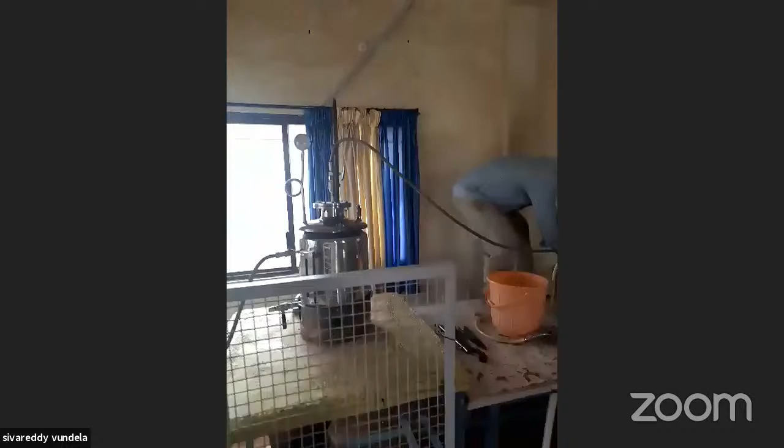Now I'm sharing the main components, then after I will explain individually. This is the small boiler. It can generate 4 liters of steam. Now you can see the pressure of the boiler also, 1.5 to 2 bar. Generally, 1.5 to 2 bar steam we send to the grinder and the cooker. This small boiler we connected, and this is the grinding and cooking unit.

Now we poured 2 kgs of soaked seed. I will show the soaked seed batch. This is the boiler. Grinding and cooking we are doing combined. And then we started the grinder.

In this model, the soaked soya seed, we are grinding. At the time of grinding itself, by steaming, we are doing cooking also. By this, we can extract more juice from the seed. That is the only motto of this combined grinding and cooking.

Some of the soya plants, what they are doing, first they are grinding and separating the milk. That milk again they are cooking. In this manner, the productivity of the milk is reducing. The energy required for the milk production may be decreasing, but the productivity of milk from the seed is reducing, and the protein levels of the milk are also reducing.

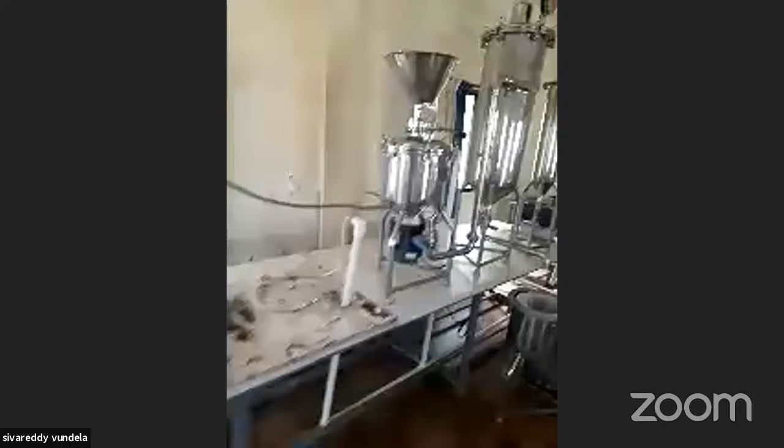Now this is the grinder cum cooker. See. Whatever steam we are producing, I think 1.5 to 2 bar pressure we are maintaining. In between that pressure, we are sending the steam. Our target here is at least it has to reach more than 1 bar pressure. More than 1 bar pressure means around 110 degrees temperature we are achieving. You can see the temperature of the grinder and juice.

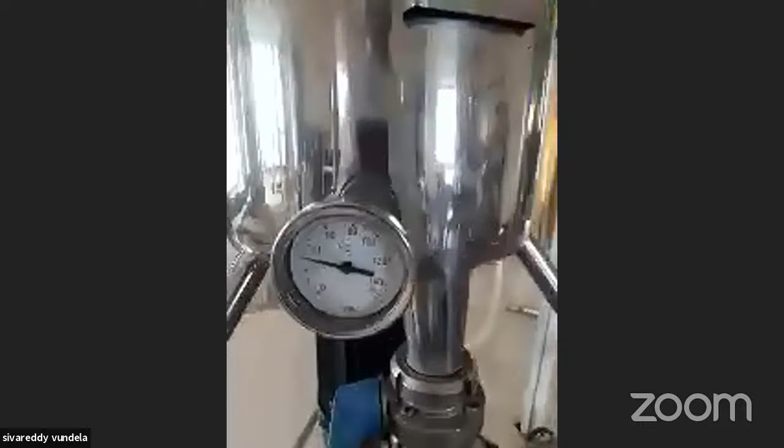For grinding and cooking it will take at least 15 to 20 minutes. Once it is crossing 100, near 100 to 110 degrees temperature, the pressure of the unit will also cross 1 to 1.5 bar. Then we will stop the steam supply to the grinder and cooker.

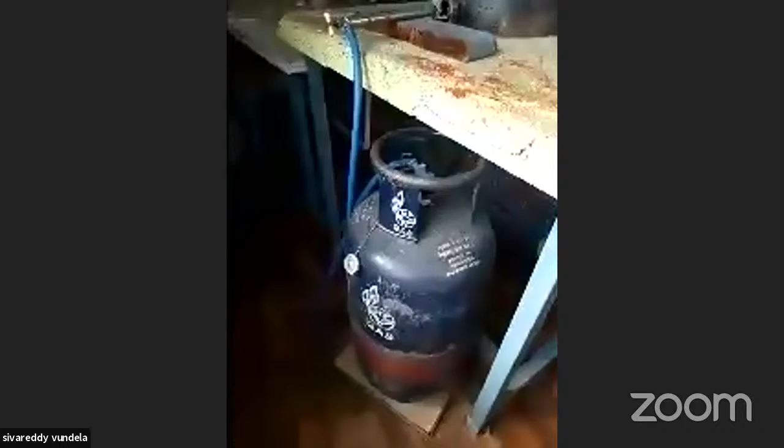For this boiler also, a general commercial LPG gas connection only we are using, because per day maximum we are running 3 to 4 shifts only. At least 4 batches per day we are doing. Per batch, by soaking 2 kgs of soya bean, we can produce 15 liters of soya milk. You can see.

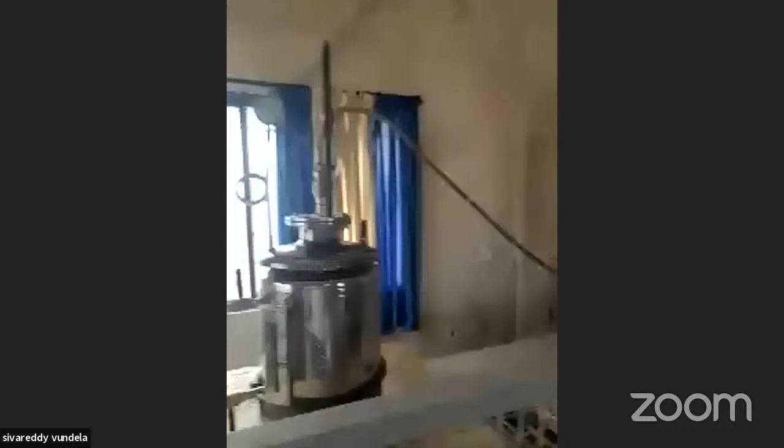Now we are mixing calcium lactate for making paneer. Once we get the milk, then we will make paneer. For curdling the milk, generally in households we use citric acid. But the main drawback of citric acid is an odor. For removal of the odor, at least 4 to 5 batches of cold water are required.

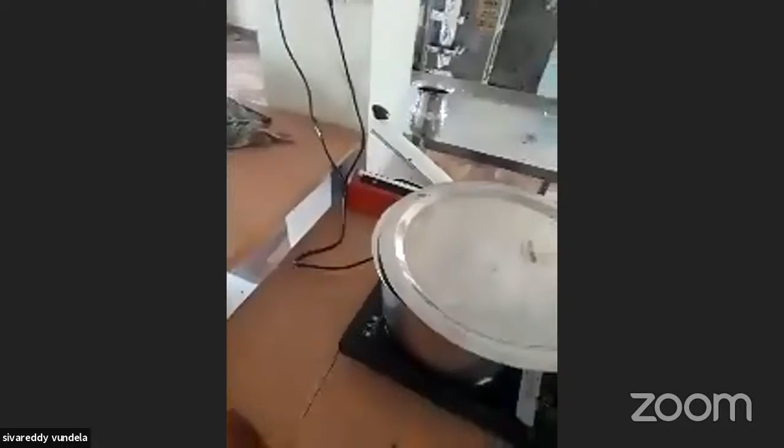See, this water we are steaming, in between 90 to 100 degrees. We are heating the water. In that hot water, we added calcium lactate.

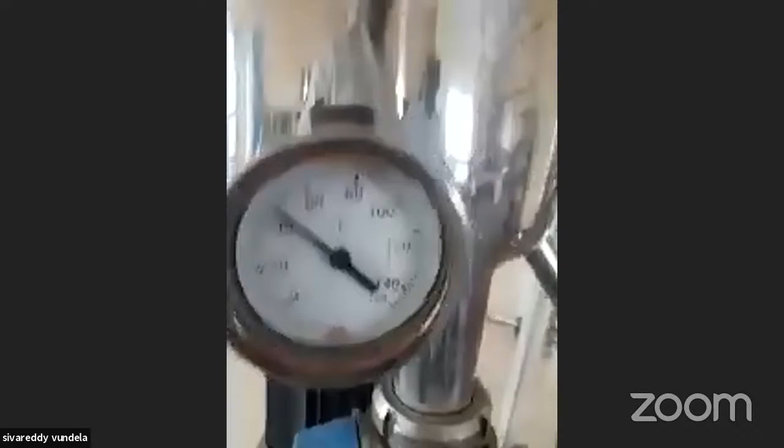Now we stopped the grinding operation. Now the roaring sound is stopped. Now only cooking we are doing. You see the temperature now. Before starting we saw 20 degrees, now it has moved to 40 degrees. Now only steaming we are doing. By steaming we are doing the cooking.

Cooking has 2 methods. If we cook by flame, the odor will increase. If we cook by steaming, proper cooking of the entire product will take place. Effective mixing, effective homogenization of the soya paste will be created. I think it will take 10 to 15 minutes. Already 10 minutes completed.

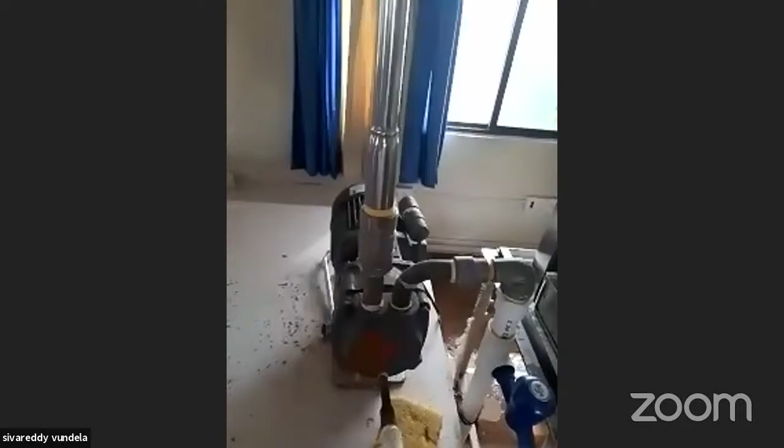Next, after this, we will do vacuum suction. We are creating vacuum by using this vacuum pump. See, by this vacuum pump, we are creating the vacuum suction, because we want to transfer this juice, the grinded and steamed soya juice, to the second tank. Directly, it will not come. Only by creating the vacuum suction will it come.

For vacuum suction, two advantages. We are removing the odor also. Material is coming forcefully into the second tank, and water is going through the pump. Water is exhausted. So some of the water we are removing by vacuum suction only.

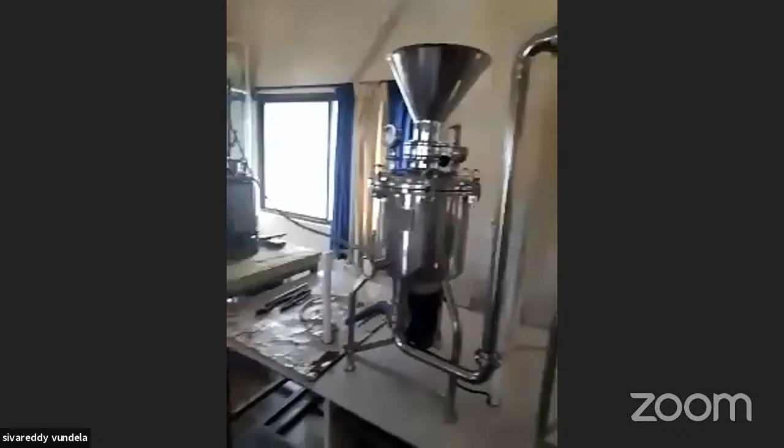If we are not using this method, the earlier method I mentioned, we soak the seed. After grinding, we separate the okara and milk. At that time, for water removal, they are not doing anything. They are adding the flavors. Once the temperature is increased, the flavor will evaporate. Again, the odor will come into the picture. We can't drink the milk. If we use this method, majority of the water we can remove at the time of vacuum suction itself.

You see the seed skin, you remove the seed skin after soaking. For 2 kgs of seed, this much of skin we remove. This skin we are directly feeding to the buffaloes or cows. The cows who are eating this high protein skin, their milk productivity is increasing. Same milk we can drink. So there is no wastage in the soya milk plant.

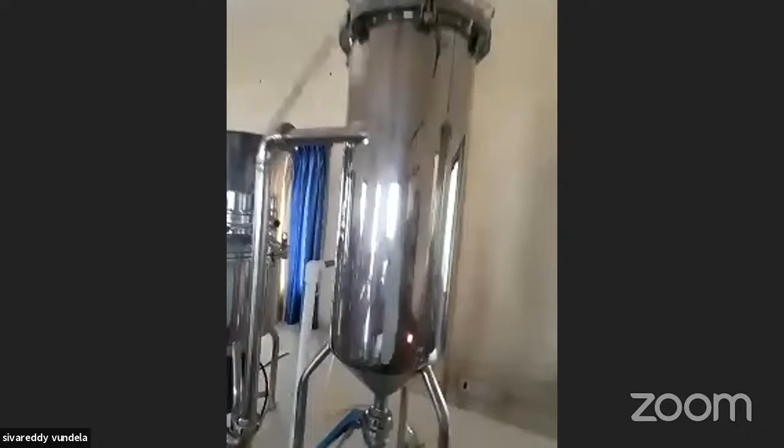Two vacuum suction tanks we connected because some of the liquid and solid will come into this place due to the vacuum capacity. If some of the liquid is coming, we don't want to waste that liquid. If we are not arranging a second tank, the liquid will directly go to the vacuum pump as wastage. So we connected the second tank, so that whatever vapors are coming due to more vacuum pressure will also condense, and we will collect milk from this second tank also. Our target is zero wastage. With zero wastage, we have to produce the milk.

Soya seed, after soaking, skin we are removing. That skin we are using for feeding the cows or buffaloes, whatever animals. Humans can eat it, but at present we are not doing any trials on human beings. We are giving it free of cost to the farmers. A small amount only, not more than 1 kg. Next.

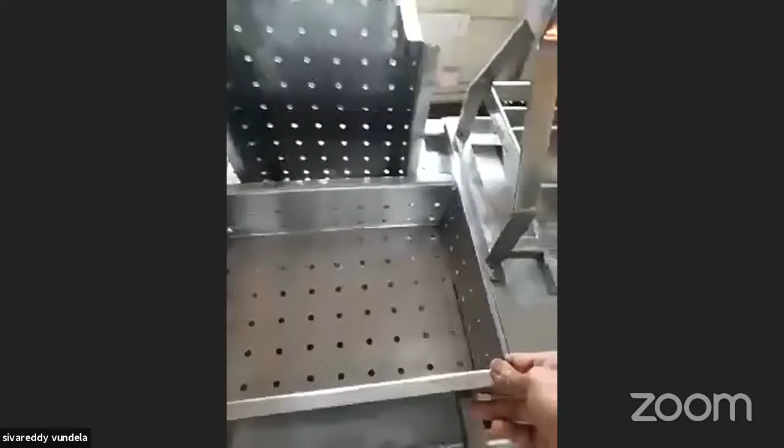After this, the calcium lactate I mentioned, see, we kept mixing. Mixes. After coagulation, while we are packing the milk, this is the paneer stand. We'll pour the solid, and whatever soya whey is coming, at present we waste it, but soya whey has the highest protein. We have to work out on soya whey also. At present we are not using whey because with a small amount we can't work. So here we are pouring.

Then we will put it in the press unit. Continuous gradual weight application. The paneer cake will be prepared. This is after preparation of the paneer. This is a paneer cutting bed. Each piece contains 250 grams. Generally we are producing 3 kgs of paneer per batch. Batch means 2 kgs of soya seed we are soaking. We can produce 3 kgs of paneer.

You see? Some flavors we are adding. It's not required. If we want to compete with badam pal or any other cool drinks, we can add these flavors. Generally, at the time of starting, we procured in 2000, I think. At present, flavor-free soya milk and soya paneer only we are producing. And in 2018, I think, we bought samples only.

The flavor companies are available in Delhi and Bangalore. They are providing all samples free of cost, 100 gram samples. You can see the samples. Which flavor is popular in our area? If we finalize it, they will send only that flavor in a 5 liter bag. Otherwise, all these flavors we get free of cost.

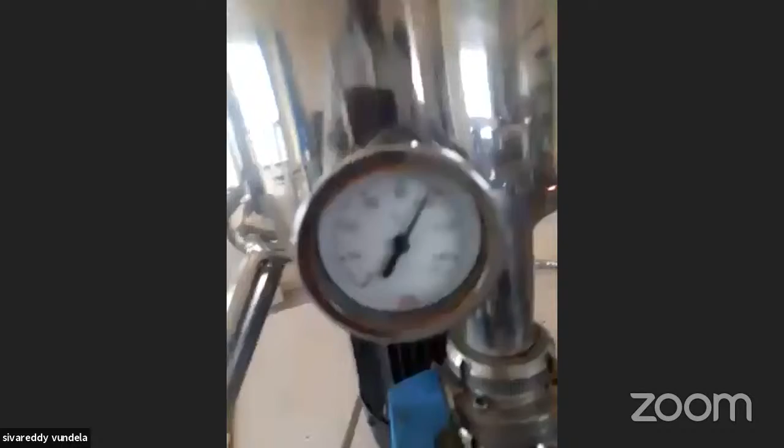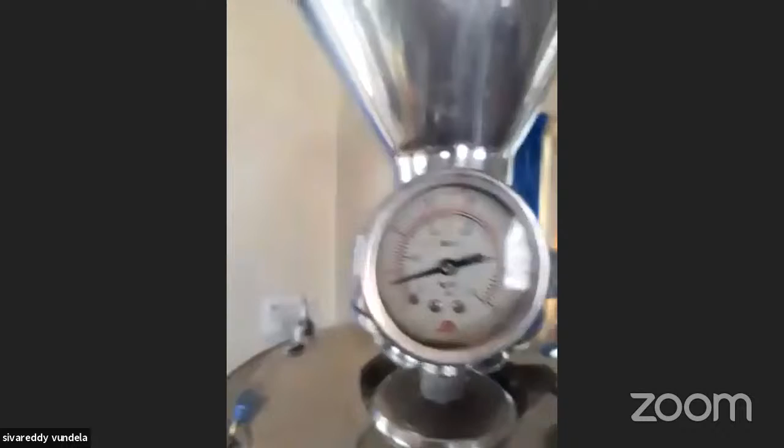Now we will go to the boiler section. What is the present condition of the boiler? Yes, now we are reaching around 100 degrees. You see, now pressure rise is also initiated. Earlier 0 pressure; this 0 means 1 atmosphere. Now it is rising. So our steaming continues. Our steam also we are maintaining

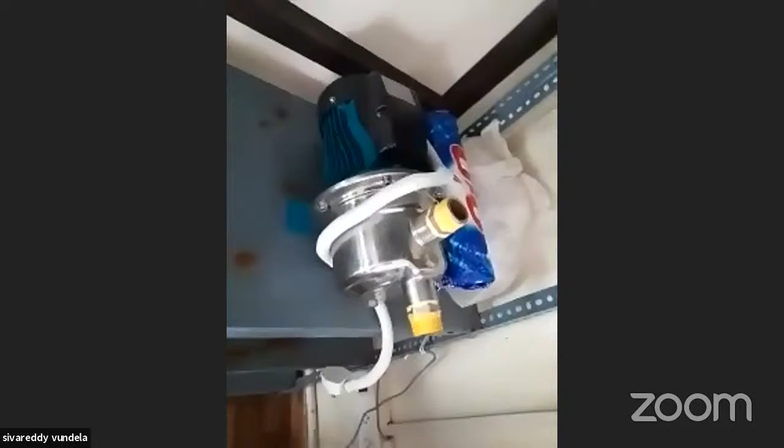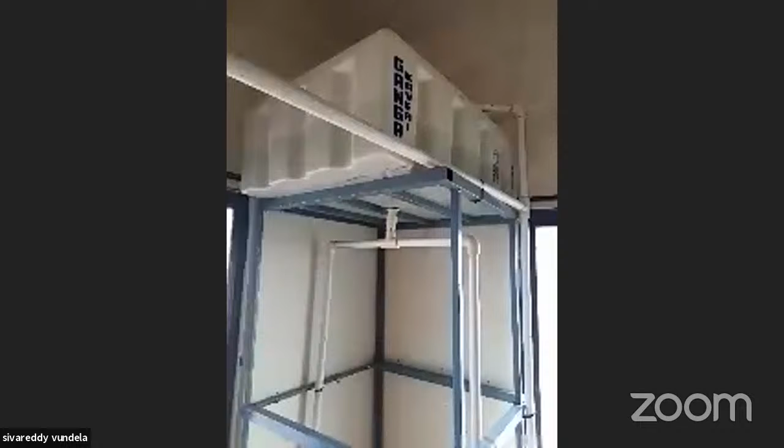And all this operates using our water plant, by pipeline connection. We are not maintaining a separate plant. The investment on RO is not a big thing. With 50,000 invested we will get the RO plant, but maintenance is required. For the entire college, one RO plant is there.

In the RO plant, we are maintaining an engineer. For the entire hostels also we have one more RO plant. From those RO plants only, by pipeline, we are getting RO water. The hardness of this water is 20 to 30 ppm. Generally, for long-term storage of soya milk, distilled water and chilled water, we can store

The rise is reaching around 1 kg. We stopped the heat supply to the boiler because we reached more than 1 bar pressure. We reached this by steaming, then we stopped the steam supply. Awesome.

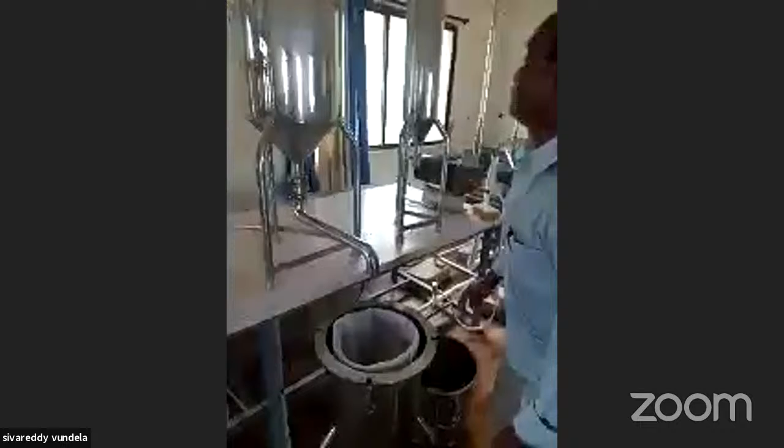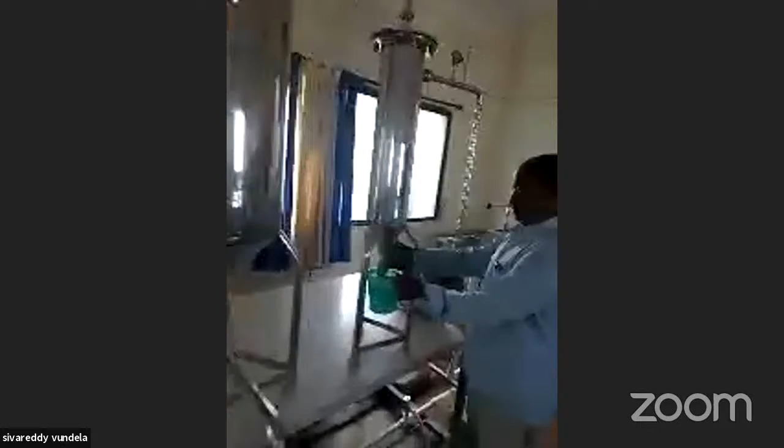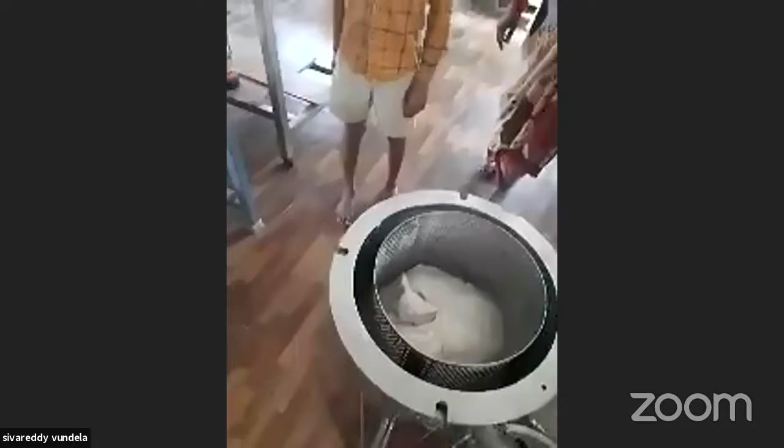You may also notice, with only one worker I am doing this entire thing. I am not using more labor for my operation. He is my assistant for solar projects and also soya milk. With one worker only I am managing this milk and paneer.

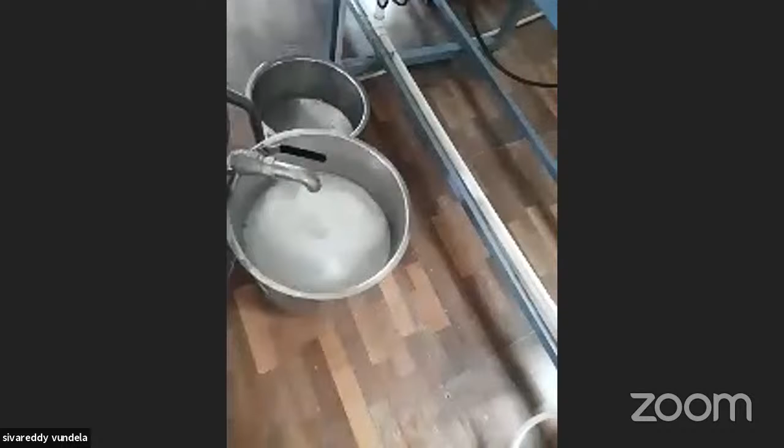In full-fledged commercial manner, like Sofit soya milk, if we want to produce 10,000 per day, full-fledged automation we can design - that expertise we have, there is no issue for that. But initially we are introducing to the public from a health-conscious point of view, not as a drinking milk.

Our batch plant capacity is 200 liters per day we can produce - this is our capacity. At present we are producing only 60 liters, so less than 50% capacity only we are running our plant.

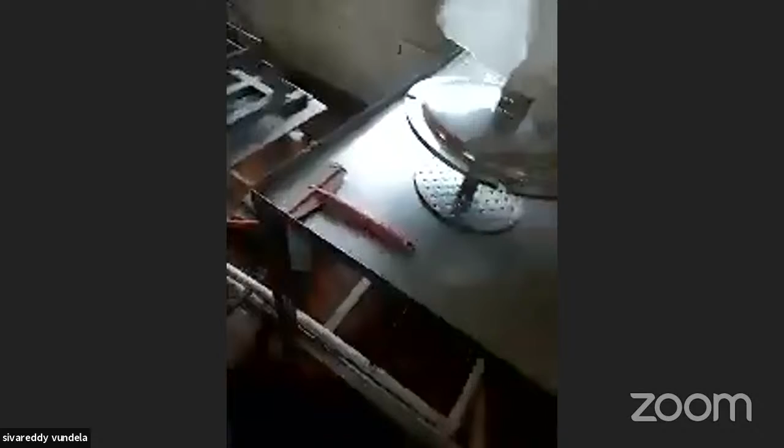We prepare a separate washroom also for cleaning of these things because we want to maintain separate washing and cleaning also. That's it.

Now you can see we are removing this cheese. This paneer whey contains more protein, but first we are adapting effective utilization of soya paneer and soya milk. Once they get very good awareness of the public in this region, Andhra Pradesh, then we will start working on this paneer whey also.

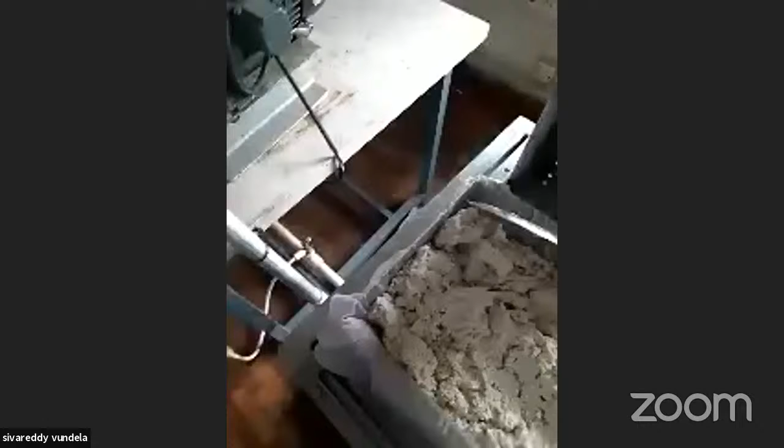Now this cake, see, by equally pouring. Because for all pieces, every piece has to maintain 250 grams, equal distribution of the mass is required. Equal distribution.

Now we are closing this one for mechanical pressing. For this also, if large capacity is needed, a pneumatic pressing unit can be purchased, but since it is a small unit, we are using a manual pressing unit only.

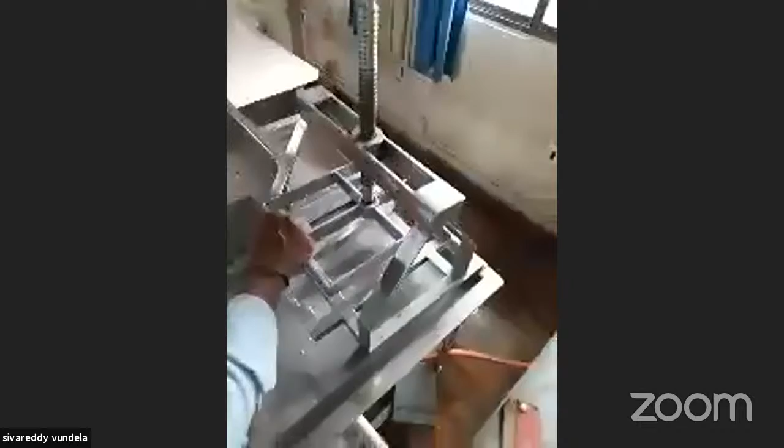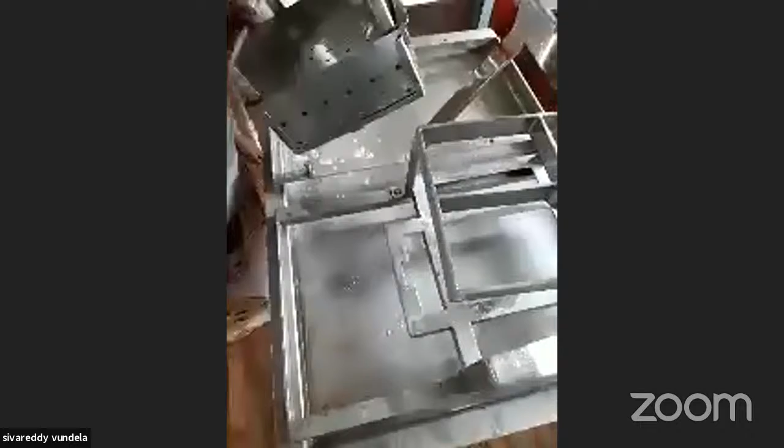Now we want to prepare effective bonding of all solid material.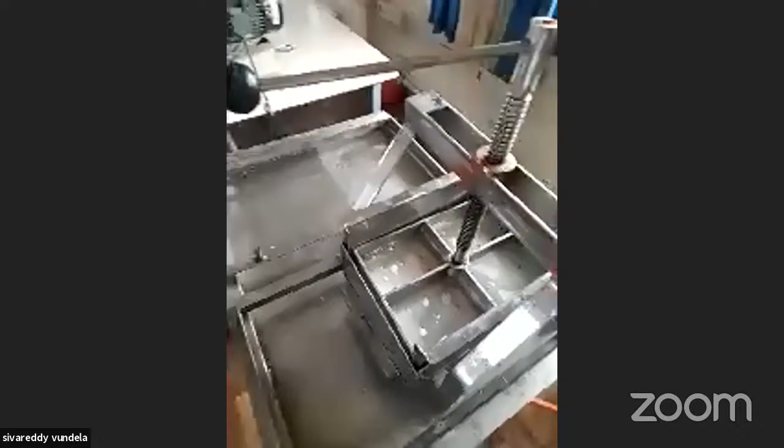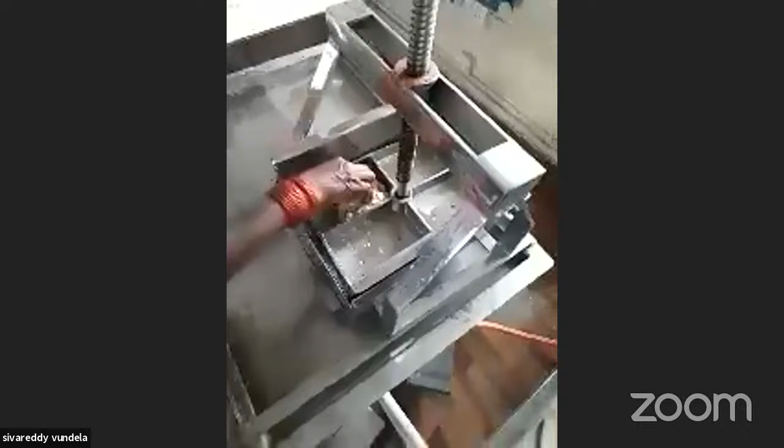At least it will take 10 to 15 minutes. Suddenly we can't apply entire pressure, so stage-wise pressure we are applying. After reaching steady state, again we are applying some more pressure for effective bonding.

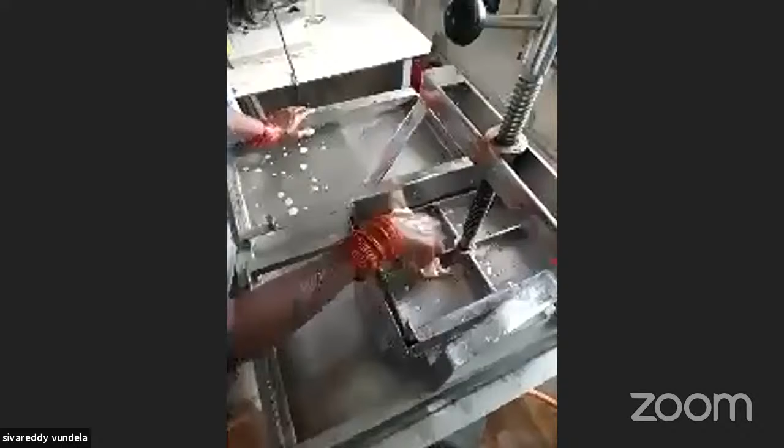You don't want to apply more pressure. By free hand, how much energy it is possible to apply, that's all. Wait some time, again bonding will take place, apply some more pressure. Like this, at least 10 minutes we are taking time. Now we started a second batch also. In the third, we are pouring the heat, liquid, and the boiler also. We started the boiler.

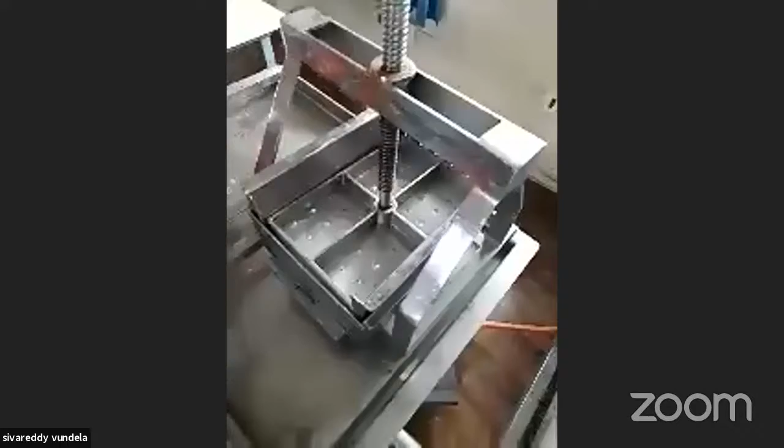Just we are removing the moisture, that's all. By pressing, whatever liquid is releasing, we are cleaning that liquid only. Wet this with water.

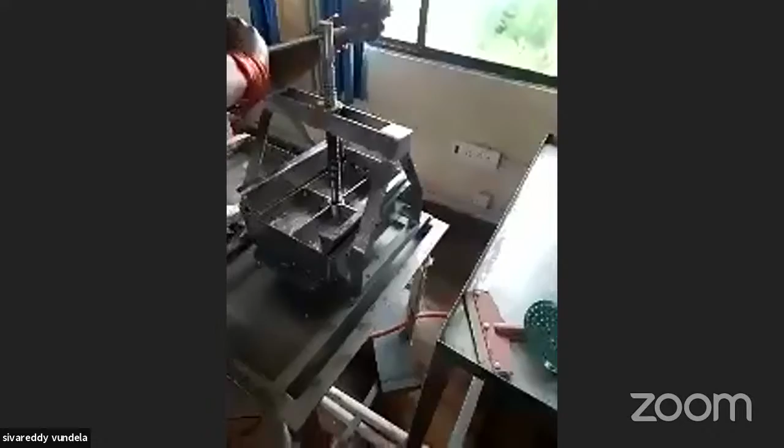You can proceed, in a defined manner.

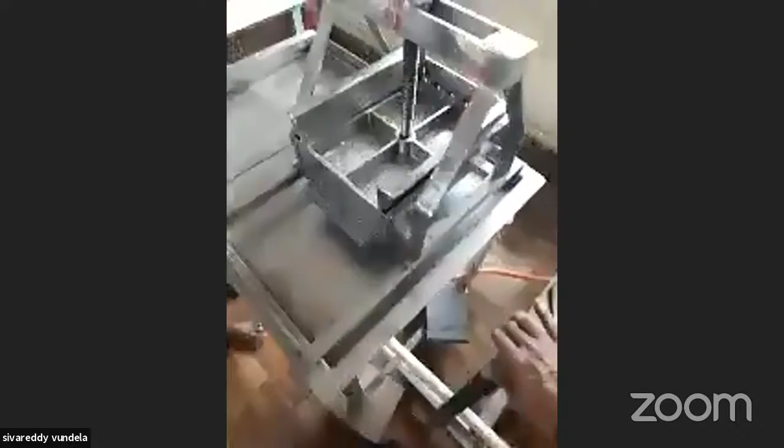The testing of this whole sequence, to confirm the paneer is prepared, is done by sense. They finalize whether paneer is prepared or not.

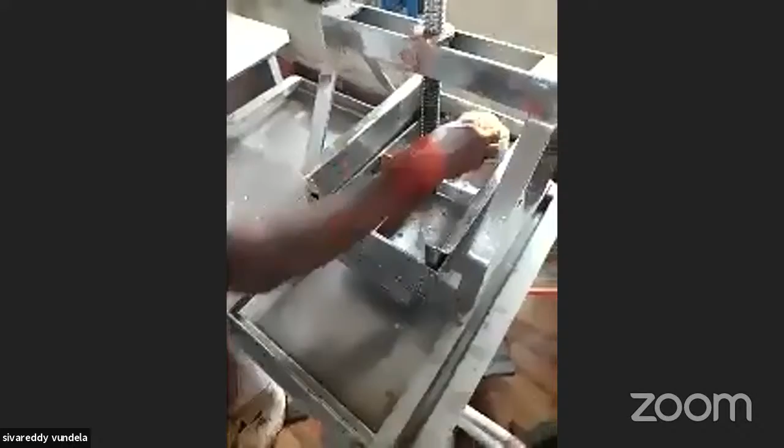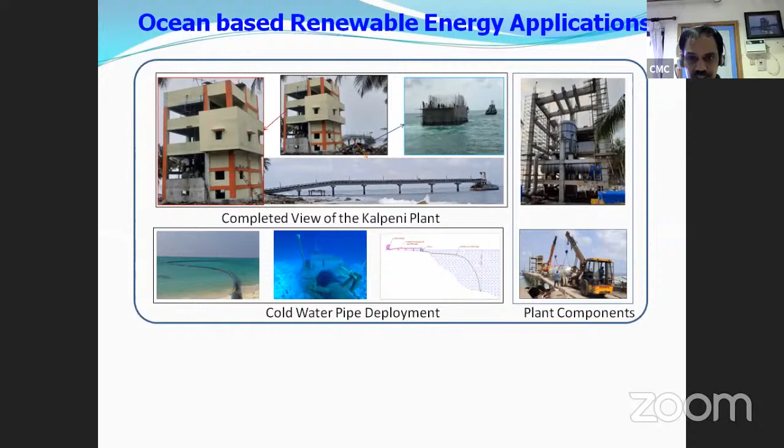Okay, first let me introduce a little bit about National Institute of Ocean Technology. We do applied research for the Ministry of Earth Sciences, Government of India. We are an autonomous body under the Ministry of Earth Sciences. We have about 10 departments within NIOT.

We handle everything related to ocean, and also some things not related to ocean, because we have attained some sort of stability in that area, so we do some other research also. I represent ocean structures and island desalination, which I will be talking about. We also work on energy and fresh water from the ocean, where we deal with wave energy turbines, current turbines, and also producing power using the temperature difference of the ocean. I will briefly touch upon these topics in my presentation.

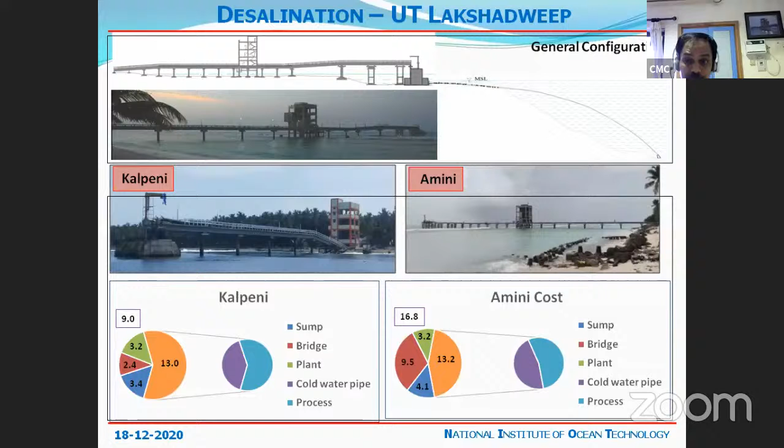Okay. So the plant has 3 components. One is the process components that I explained. For the ocean related aspects, I have to install the pumps in 5-meter water depth. So we install it in a caisson in 5-meter water depth. Okay. And in the caisson, the surface water around the caisson will be drawn as warm water. From the caisson, one pipe will go up to the 350-meter water depth. The pipe is around 1 kilometer long. Okay, and is made up of HDPE, single length HDPE pipe. Okay, and we take it to that depth and we draw water from there.

All we need is provide the power for friction losses. Except for friction losses, we are not lifting any water. So pump power wise, to draw 100 liters of water, I may be using around 13 kilowatts of power. Okay. Like 150 liters per second flow for 1 kilometer long, I'll be using around 13 kilowatts of power. This is the pump power that I'm talking about. Okay, that completes the cold water side. Then I have a sump in 5-meter water depth. I need access to that.

One bridge is needed from shore to the sump, and also a plant building I have. So on the civil construction side, I have three components: one bridge, one sump, and one plant building. Then process is mechanical. The other part is ocean related, which combines with the oceanography side of the aspects.

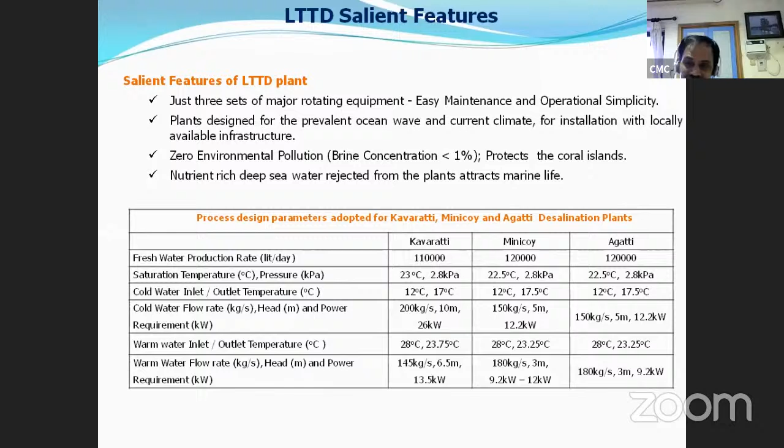Okay. When you see the desalination technology, one is the thermal desalination that I am talking about, where we are working with naturally available water since we cannot heat water. That is because of Indian economics. When you go to the Gulf, they have oil or petrol to heat water. They will heat up to say 85 degrees, and instead of one stage using only one condenser, they use a 5-stage desalination where in stages the temperature will come down, and there are plants that can work up to 100,000 meter cube per day freshwater generation capacity.

When you go to multi-effect desalination and multi-stage flash process, those are thermal processes being operated in the Gulf. Okay, this is the thermal desalination field as far as thermal desalination is concerned worldwide. Then the other desalination that you generally hear of is membrane-based desalination.

There you pass water through a membrane. Because of the reverse osmosis, on the high pressure side, salt will be there. On the low pressure side, the pure liquid will go. So I can extract water. This is what you see in your domestic reverse osmosis based plants. Normally, reverse osmosis plants take around 4 units of power per 1 meter cube. That means 1,000 liters. That is the power consumption of these plants.

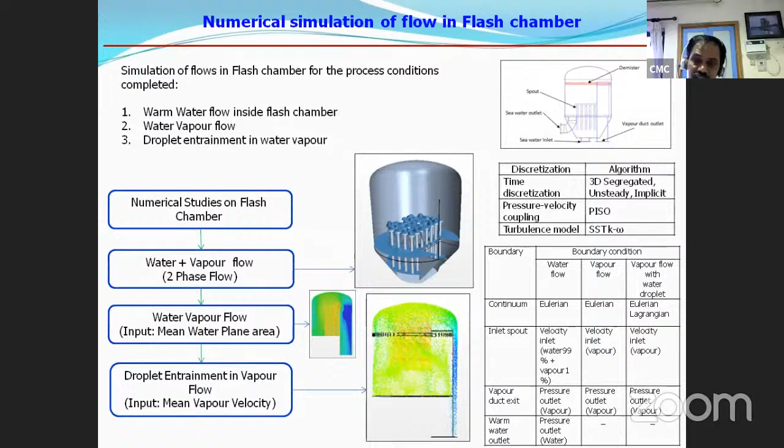This is some study on how the vapor flows in the flash chamber. Okay. Then this is a study on how water droplets get entrained along with the vapor. And there is something called a demister. Then how do you separate it? How do you separate the water particles so that you can improve the quality of water? These are some of the studies.

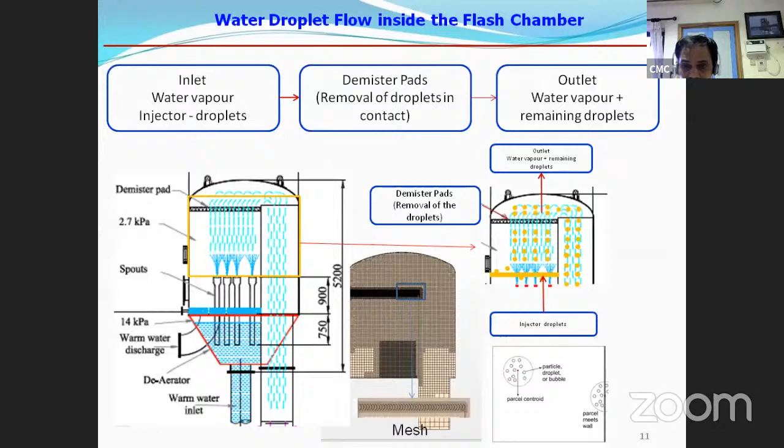Then, this is the droplet study, where if you leave droplets in the middle of the jet, how the droplets will go to the other side. This is a computational study on that. Okay, this is the deep sea water, deep sea cold water pipe.

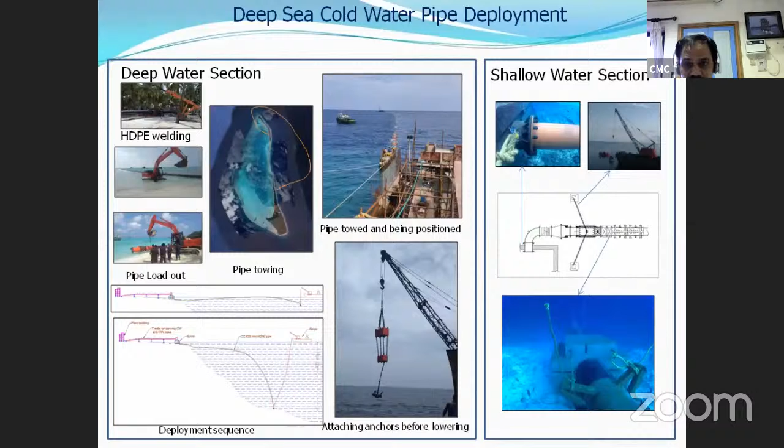This is the actual plant that is installed in Kalpeni, one of our latest plants. This is the Kalpeni plant again, when we produced water in January of last year. These are the marine structures that we use. I already explained in detail. This is the bridge and the sump.

Even some of the piers that come after the breaker, that means waves break after 1 meter depth in the ocean. After the breaker, you cannot freely work in the depth. So apart from the sump, which we construct in stages, even the foundation for the bridge we construct in stages. That means we put a table in the middle of the water. The table will be breaking the water surface. Then we pour concrete on the table so that the entire foundation for the pier is cast there.

Then you raise the height of the pier so that after installation it will break the water surface. Then we maintain the weight of the pier in such a way that I can lift it with chain pulley blocks. Once it is set, I will lift this foundation, remove the table and lower it. So this is a gravity foundation, typically for 100 meters of a 200-meter long pier. The foundation is done using this technology. In the other area we directly drive piles into the soil.

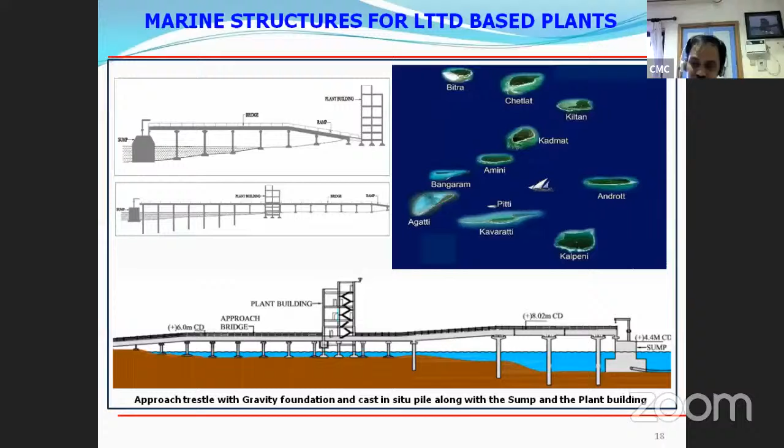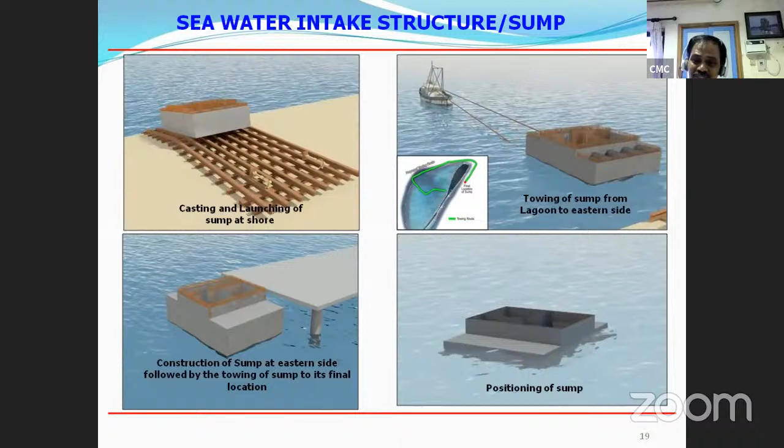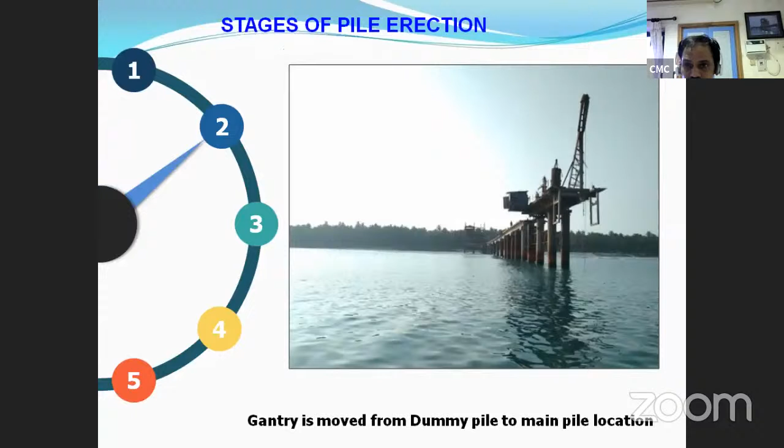These are the piers. This is the piling that we do. These are the piles that we are handling in one of the island projects. These are the stages of the sump and sump stability. For various waves, how will it respond, and while towing, how will it respond? These are some of the studies that we do on the sump. This is the towing analysis for the sump.

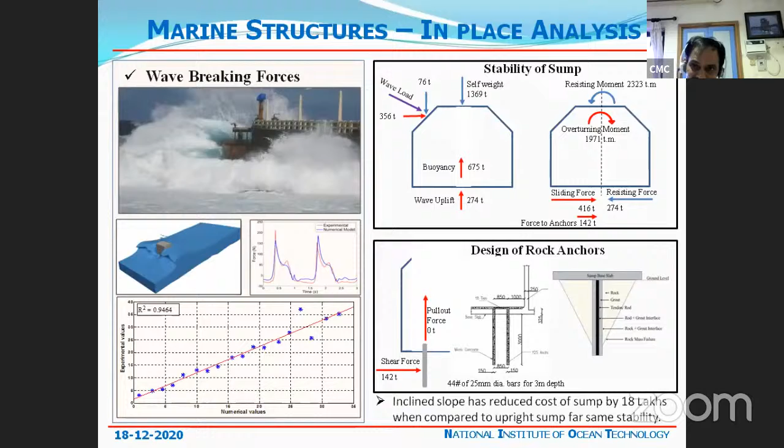Then this is the in-place stability analysis of the sump, where we check for overturning and sliding, and accordingly we provide rock anchors for the existing condition of the seabed. This is a numerical study on the sump. These are some of the equations. Then these are some of the results.

Then how do I design these plants? For various temperatures, that is the temperature difference. These are the equipment. For various capacities, the basic design equation is: what is the heat lost by warm water, what is the heat gained by vapor, and what is the heat gained by cold water. Then what is the flow needed for the temperature difference that I am working on, and accordingly, what flow rate I need to maintain.

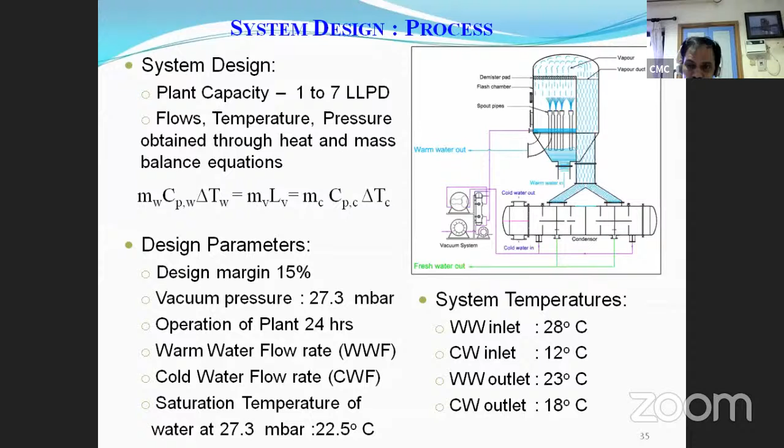Then for that flow rate, what is the size of the condenser, what is the size of the flash chamber, then vacuum, how to design that vacuum system, and what is the load of that vacuum system. These are the typical things that we go through in the design. For various capacities, we went through the design. Any questions up to this part?

Hello. Sir, tell me, any questions up to this part? No, sir. Am I too fast? No, sir. Are you able to understand? Yes, sir, clearly.

The next part I am handling is for remote villages, coastal villages. I talked about the temperature difference and all the power plants, and about working with a technology useful for our public and economics. What I'm going to talk about next is that this temperature difference is not available except at a few places like a power plant or remote island. If I go to any coastal village, even though it is by the sea, for various reasons it may not have proper drinking water. There are a lot of villages like that.

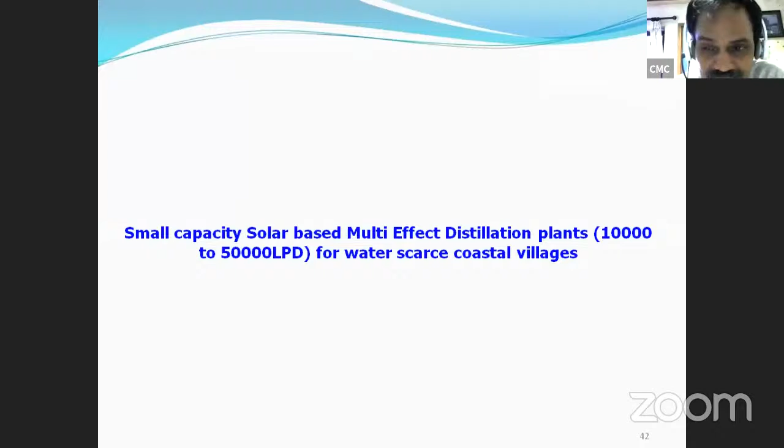What we are doing is, there is Vivekananda Kendra near Kanyakumari. We demonstrated a solar-based desalination plant with a capacity of 10,000 liters per day - that means hardly one water tanker per day. But this one water tanker is coming completely from solar, nothing, no pumps involved.

The pumps we are talking about are at the most 1 HP pumps, or 1-2 HP pumps, for drawing surface water and giving it to the vacuum system and the flash evaporator. So what we do is similar to what people do in the Gulf, where they heat water and use multi-stage, multi-effect desalination.

We use it in 4 effects, where from 65 degrees we come down to around 42 degrees - that means we use around 22 degrees of heat. For each 5.8 degrees of water, because of the CP and latent heat relation, I can get only 1% of fresh water. So for this plant, since I am using around 20 degrees, I'll be working at around 4% efficiency - for every 100 liters, I'll get 4 liters of fresh water.

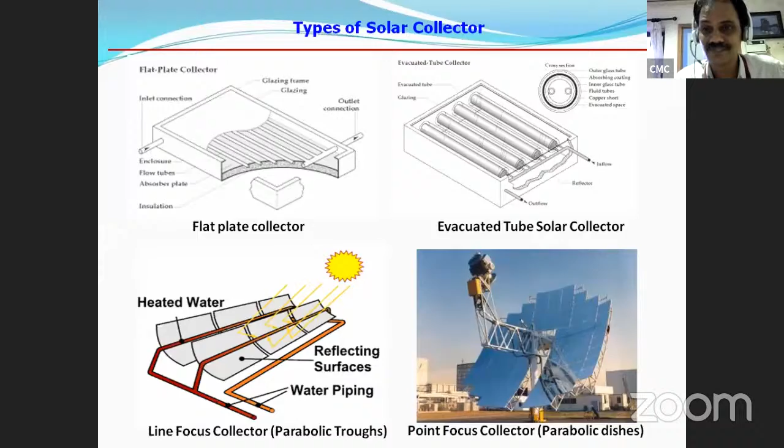These are the typical areas needed and the cost of the solar collectors we are talking about. The cost of the plant I have already given. This is the design for a 10,000 liters per day capacity plant. The power-wise, the bottom pie chart will show the power required for various components, and what the cost is for each component. The cost components are for marine structures, multi-effect desalination, the solar collectors, and the pumps.

Typically, the desalination plant will take about 50% of the total cost, marine structures will take 20% of the cost, 15% will go to solar collectors, and 12% to the pumps.

Cost per liter comes to around 0.47 when you consider the capital invested. The person installing it gets back the money invested after say 20 years, so he can invest in a new plant, and also a profit percentage of around 7% to 11% is involved. So around 47 paise per liter is the cost when you are talking about a 50,000 liters per day capacity plant constructed without any government subsidy.

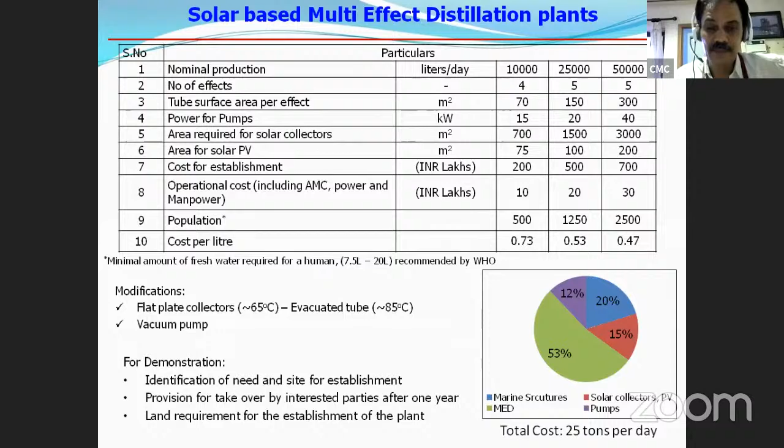The next topic I'm talking about is somewhat current if you are following the news. Recently, Modi Sahab inaugurated a wind project in Gujarat.

We are contributing in a small way, or major way, depending on the angle you are trying to see it from. When you see wind energy, land-based wind energy, the capacity is exhausted by all the land-based turbines installed in various regions. Now you can install wherever land-based wind energy is still available.

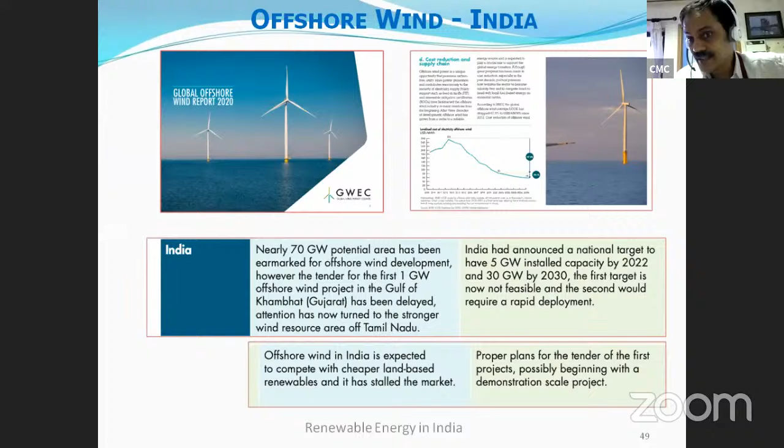What we are working on is a foundation for this wind energy.

We are working on the foundations for these offshore wind energy structures. Typically for the Gujarat site, the Gulf of Kutch and Khambhat, the tide varies about 5 meters in the ocean. That means between low tide and high tide there is a difference of about 1.5 floors in the water level. So we have to have structures, and these wind turbines are installed in 20-meter water depth.

We look at what ocean parameters are available there, what the geophysical condition is, how we can install a pier at that depth, and mostly these piers have to be piled, meaning a steel structure has to be installed. So how can I pile these things? All these things are involved in designing them. So we installed the foundations for these wind platforms.

For 2 years you have to measure the wind availability so that the project funding can be approved. One structure was installed near Jakhau, Gulf of Kutch, around 2018 or so. Another structure is installed in Gulf of Khambhat near Pipavav. Both these structures are installed in 20-meter water depth.

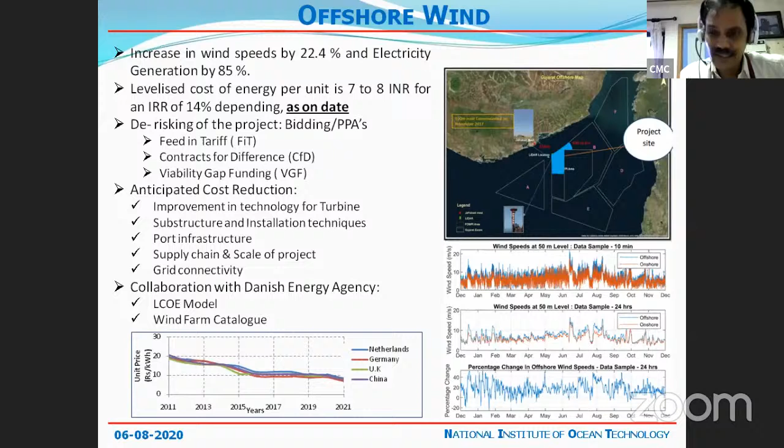A lidar is installed, and right now we are doing measurements. That is the research we are doing as of now. For that we also collect wind speeds and wave details.

Then the actual research we do is pile-soil interaction, how the 50-meter long pipe will respond to various waves and current loads. And what thickness is needed for this pipe, and because of corrosion, what thickness can I allow? All these things we handle in the research we normally do.

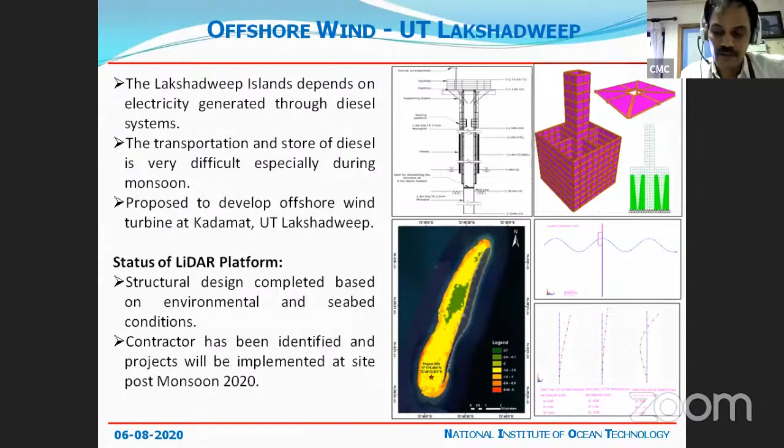We are also installing one more wind turbine in one of the Lakshadweep Islands as part of this program.

Apart from these two, we are also working on shore protection projects where we install a caisson, the sump that I am talking about, a variant of that caisson in such a way that when you see...

Typical profiles for our Indian Ocean: during one season coastal currents go from south to north, during another season they go from north to south, and erosion is observed in one of the seasons. So what we do is, wherever erosion is there, we install some structures just below the water level, so that on one side it can trap the sand and reduce the erosion, and on the other side we are not completely blocking, so that by developing a beach on the south, we are not introducing erosion on the north side.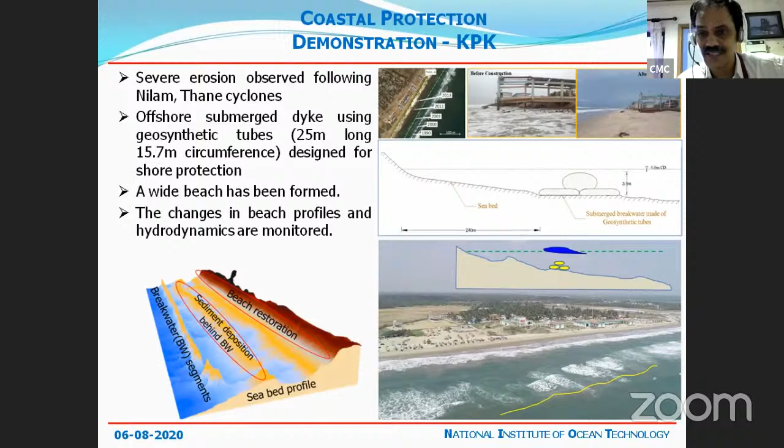So what we did is, we installed two such structures. One is near Pondicherry, where we installed a 150-meter long caisson with a 150-meter base and 3-meter height. We installed this caisson, which weighs around 900 tons, in Pondicherry, and we observed beach development as seen in the top corner of this slide. If you see, this is the beach before and after installing the caisson.

The same thing what we did is, in one of the coastal villages in Kadalur Periyakuppam, we installed a geosynthetic bag of height 1.2 meters in 2-meter water depth, and we filled it with sand. Once we do that, it is possible to trap the sand and develop the beach. So we demonstrated the project in Kadalur Periyakuppam area.

So basically the type of research that we do here is ocean related research, where if I install a particular structure, how the wave rotates and how it will affect the erosion or sediment deposition. This is the research that we do.

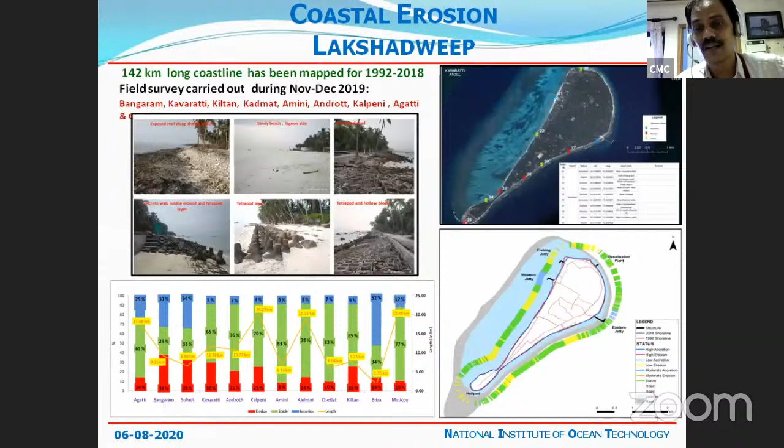Okay, this brings an end to the topic. I can understand that most of the talking is from my side. I presented 3 topics: renewable energy, or desalination as part of the offshoot of that; and also wind energy, what are the structures that we can design so that we can install wind turbines; and also beach restoration as an offshoot of both renewable energy and coastal structures. This is the way in which I was trying to cover it.

If you have any open questions in the areas that I talked about, or any general topics related to renewable energy, desalination, erosion, anything, I'll be happy to answer.

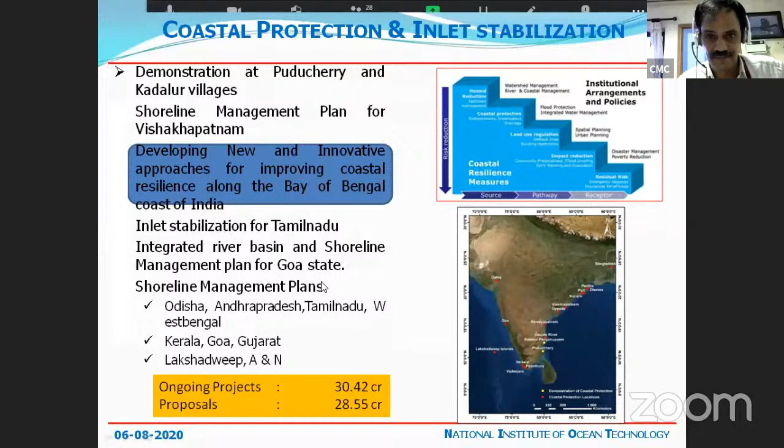One doubt from the organizing team itself, sir. Yes, yes. Actually, for the desalination, the investment cost you mentioned is too high.

Yeah, very good, it's a very good question. Now, I have also talked about the cost of energy that is needed for producing that water - the 8 units, 6 units and 4 units. A typical RO plant costs around 4 units. Now, for every million liters generated, for every meter cube, there is a typical cost for the RO plant - that is the installation cost that is needed. Every 2 years I have to change the membranes, so 25% of the project cost will go into the membranes.

So when you see what we did, we are not saying that low temperature thermal desalination is the whole and sole solution for any problem. We are not saying that. In some of the areas, it will be cheaper than RO. That is what we want to highlight.